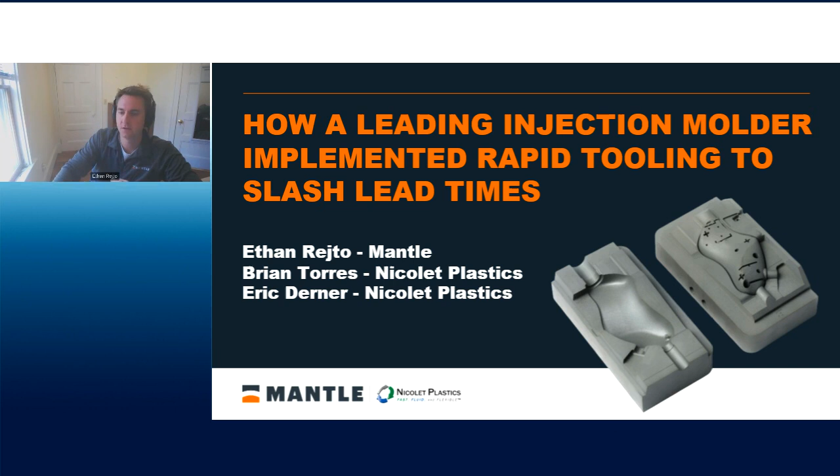A quick agenda for today, and feel free to ask any questions throughout, we'll be happy to take them. We're going to start with a quick introduction to Nicolet Plastics, who they are and what their business is. We'll talk about Nicolet Plastics and their journey with 3D printing in general, and about Nicolet Plastics and tooling. We'll do a quick introduction to Mantle's technology and how it works, specifically how it was designed to produce injection mold tooling. I have a couple inserts on my desk here today that we'll be talking about and looking at. Then we'll discuss how the impact is adding value at Nicolet, and look at some examples of how they've been using the technology, plus a few other examples as well.

So with that, I'll turn it over to Brian here to tell us a little bit more about Nicolet and their operations.

Good afternoon everyone, Brian Torres with Nicolet Plastics. I am the Chief Commercial Officer here. A little introduction about Nicolet Plastics: tooling is very much at the heart of who we are and who we continue to be. Our humble beginnings started in 1976 as a tool maker, and over the years we transitioned into an injection molder, continuing our tooling efforts in 1985, which is when Nicolet Plastics was founded.

Through the years and changed ownership, ultimately Nicolet Plastics was purchased in March of 2017 by a family-owned business that's very much a staple in the Wisconsin area. The family was looking to diversify their ownership and ultimately decided to start up a manufacturing arm of the family business, and that's really when True Venture Composites was established. Nicolet Plastics is the first manufacturer within that family ownership division.

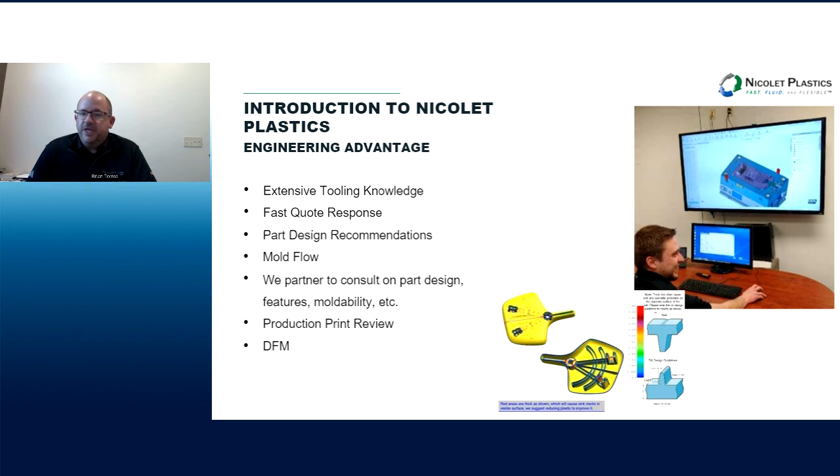Mentioned part design recommendations. We do have an entry-level mold flow analysis in-house. When we have projects that require more of that, we often partner with the Beaumont group to take us through more in-depth mold flow analysis. But we provide our customers with DFMs, production print reviews, and ultimately the earlier we partner with our customers, the more value we find in what we provide to them. And so, like I said, with material recommendations, design recommendations, the earlier we get involved in the project, the more value we can bring to the table.

We do have 3D printing capabilities with a carbon 3D printer that we brought online in 2019. We utilize this machine primarily for verification, prototype plastic parts for our customers. We actually also have some customers whose volumes are so low that they don't really warrant the investment into a tool. And so they will actually order plastic production parts off of our carbon 3D printer.

And the really nice thing that this allows us to do is really partner with our customers through the process. So not only can we produce prototype fit, form, function samples off the carbon printer, but now with the Mantle technology, it allows us to print rapid prototyping tooling, which we'll get into in a little bit. But with this technology, it allows us to provide our valued customers parts within hours, not weeks, in a traditional molding environment.

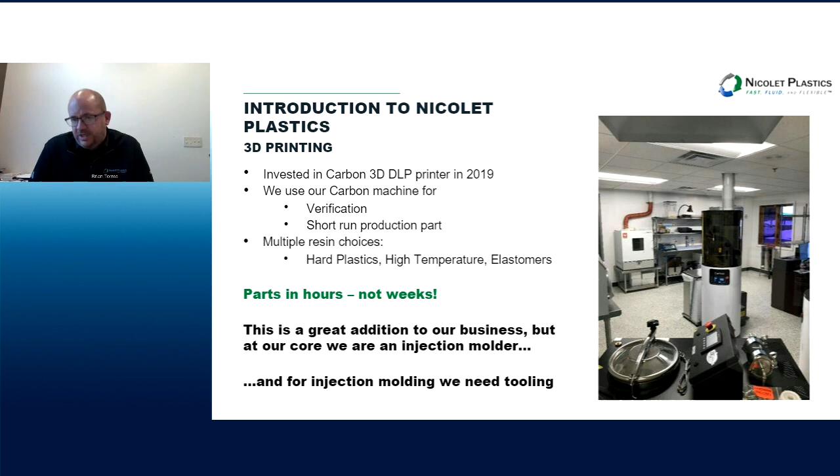Our tool room is in our Mountain, Wisconsin facility. That facility supports our tooling needs for all three, well, two of our current operating facilities, ultimately all three once we get up and running. We've got 6 full-time journeyman tool makers on staff, capable of managing rather large projects, up to and at times over 100 total tools. We do some of our own complete tooling builds from the ground up, continuing to do more of that with the Mantle technology. We also outsource some of our tooling both domestically and offshore. But by and large, we're doing almost all of our mold builds, engineering changes, maintenance, repairs, and modifications in our Mountain, Wisconsin tool room.

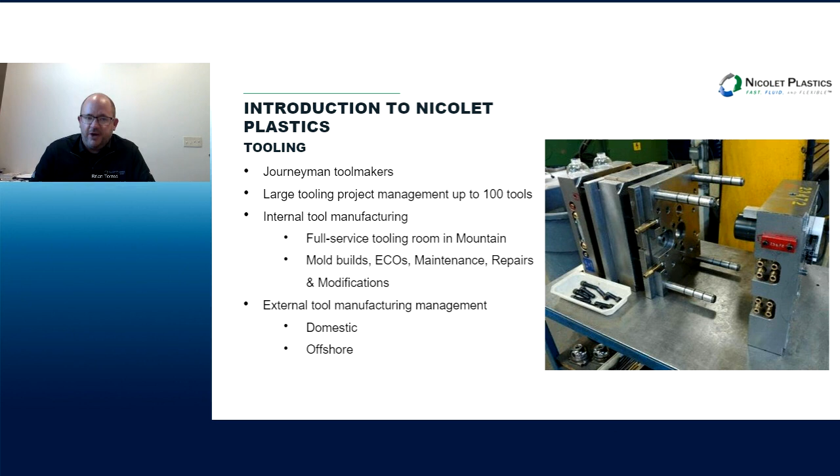Good afternoon, everybody. So some of the challenges that a lot of people run into with tooling out there in the real world is long lead times, and along with that comes the high costs. Prototype tooling is challenging - it's hard to do very cheaply and very quickly these days. It's also hard to find experienced tool makers. They're not around anymore, they're like gold. So if you have some good ones, please hang on to them.

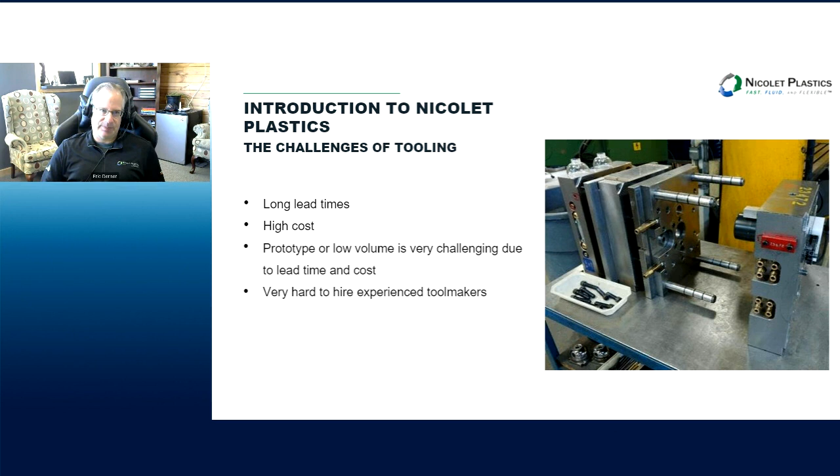So that kind of leads us into why did we choose Mantle. Mantle allows us to make production tooling in actual prototype time. Think about it - if you're thinking about making some plastic parts and you really need to test this in an injection mold tool, we can now make that tool within a week. And it's actually a good production grade tool. We're talking H13 pre-hardened steel here for tooling.

Most of the inserts that we print with, when they come out of the machine, they're anywhere between 75 and 95% complete. Obviously you still got to do some waterline tapping, clean up ejector pin holes, and do some final fitting on some of the shut-off surfaces. So again, it's dramatically reduced our lead time.

And with bringing the Mantle machine on, I kind of think of it as a three-quarter journeyman tool maker, right? They're doing all the magic behind the scenes. This thing is going by itself. It's been a great addition to Nicolet Plastics.

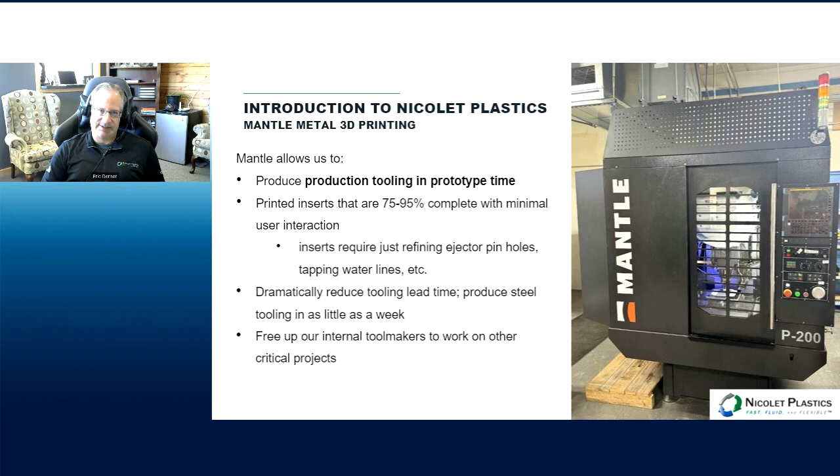So it is expanding our business. We're trying to get involved with our customers quicker because we're able to offer them some of the prototype solutions they're looking for. Some of the other things that are really good eye openers now with this process being a platform-up type manufacturing process is we can offer conformal cooling, where we couldn't do it before effectively and cost effectively. It just becomes part of the package now with building a tool from the platform up - you can just automatically add the conformal cooling.

Again, producing highly complex parts - that's kind of where the Mantle machine really shines. I would actually call it a core making machine, where you have a lot of ribs and stuff that you traditionally burn with an EDM, really complex geometry. That's where the magic of this machine really, really shines.

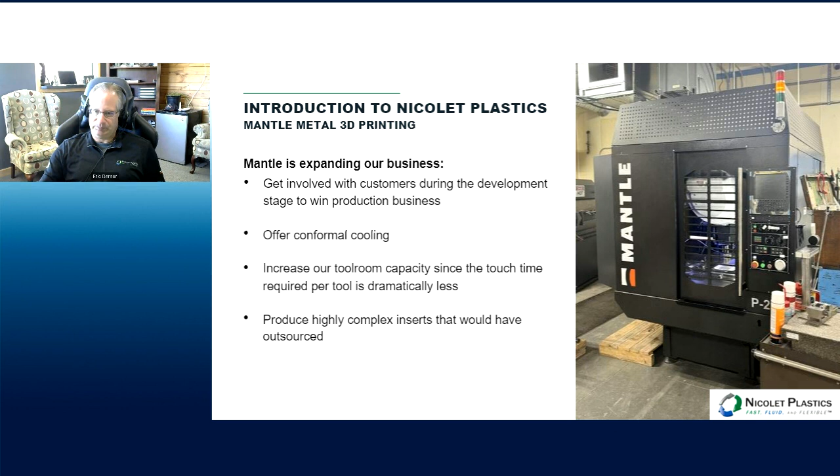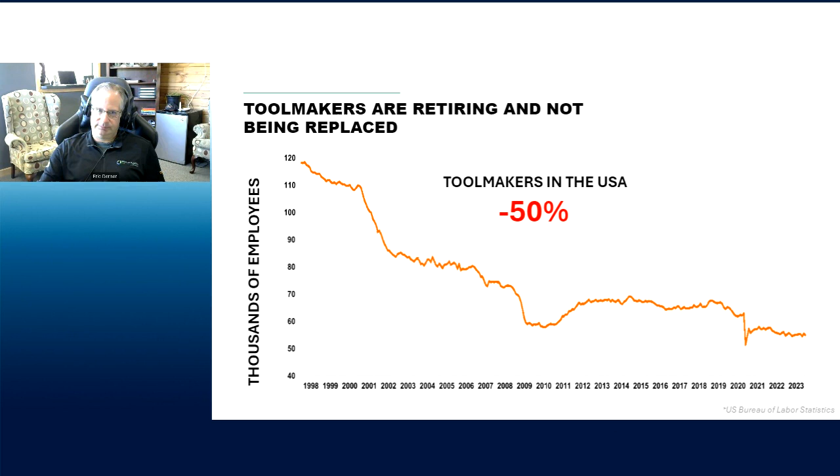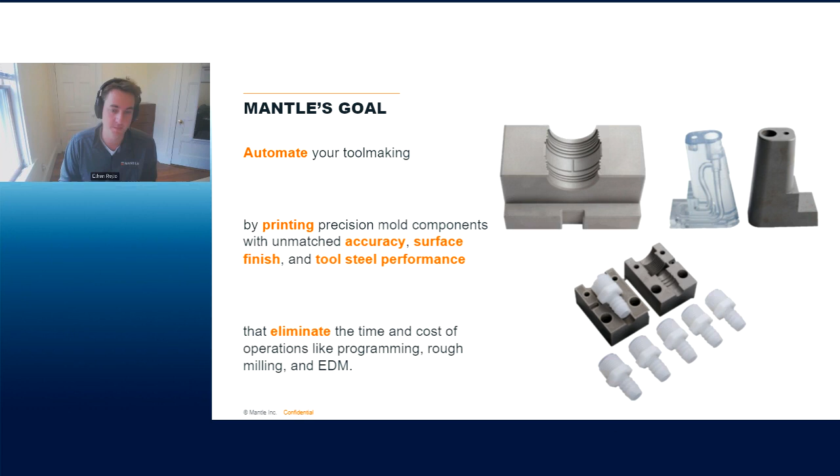Awesome, thanks Eric. I know we'll get back to you in a little while to talk through some of the use cases, but quickly I want to chime in here and share a little bit more about Mantle and how it works. Mantle at our core has a technology that was designed to automate your toolmaking processes. We do this by printing precision mold components with unmatched accuracy, surface finish, and tool steel performance, with the real value being that it eliminates much of the time and cost of a traditional toolmaking process - like Eric just mentioned, those EDM steps, the rough milling steps, the wire EDM, and the programming involved, all of that being eliminated and automated with the technology.

And one thing that's very unique to Mantle is that our technology was designed specifically for printing injection mold tools. It's the only application we target, it's the only application we do. All of our customers are using it for printing injection mold inserts.

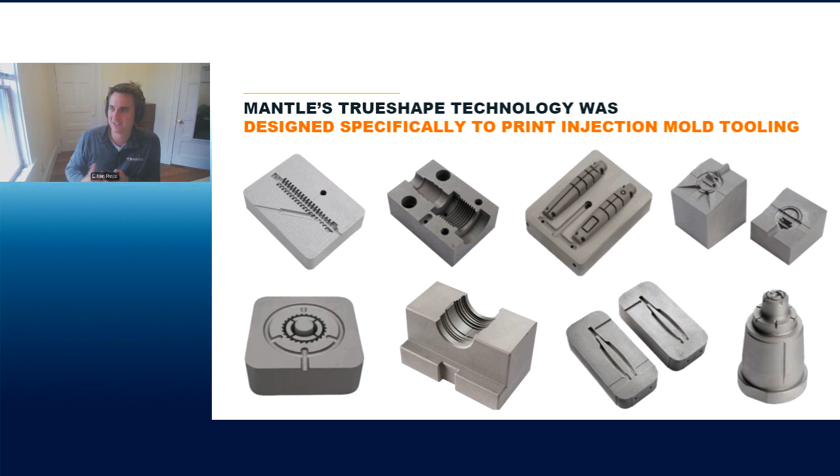We're not doing rocket parts or medical parts or anything like that other metal 3D printing companies are doing. The only thing we're printing today is injection mold inserts, and that's what our customers are using. We knew the requirements for injection mold tooling were quite stringent and difficult, and we really designed our technology to deliver on that.

In terms of surface finish, we see a 1 to 3 micron RA, on a Charmilles 26 or a D2. I don't know, Eric, what you think, but we often compare it to a fine sink EDM finish. Can you chime in on what the finish on a Mantle insert would be in comparison? Yeah, that's about really what it is. You can really get down to the final finish steel even with just rubbing a 400 grit stone on it. It polishes out really, really well.

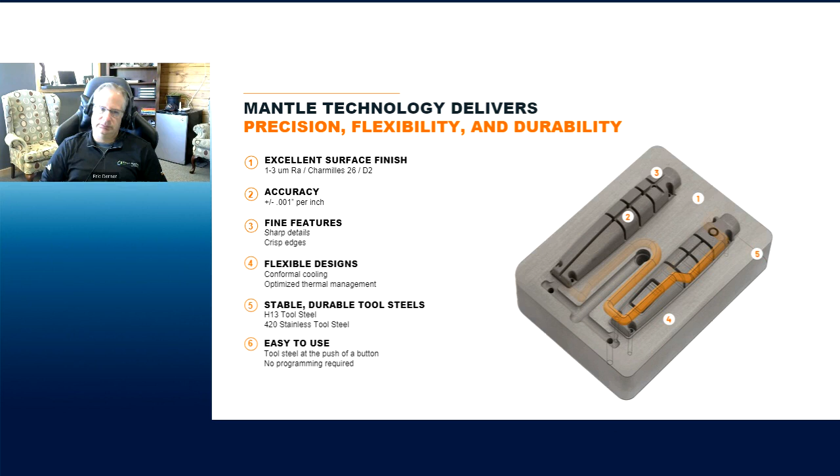That's a good thing to add, that of course it can be polished up to those mirror A2 finishes if you need to, but as printed, you're getting that matte surface finish, holding a thou per inch tolerance, really sharp, crisp details, EDM sharp features, which we'll talk about how we accomplish that, flexible designs to enable things like conformal cooling, like Eric mentioned.

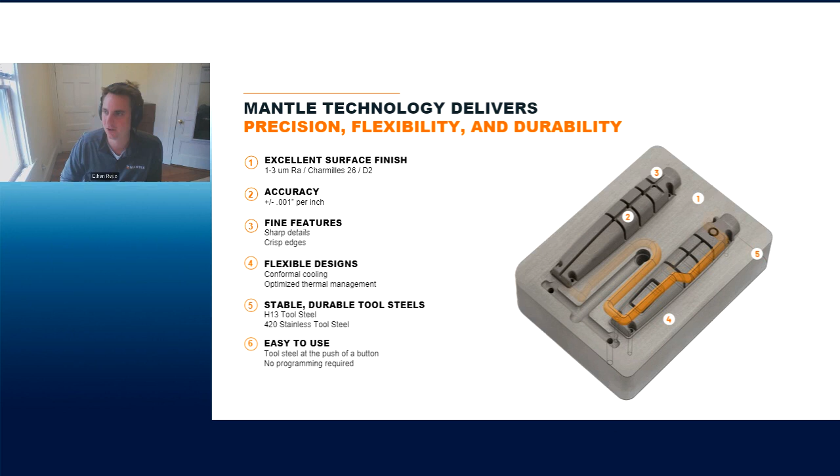Stable, durable, well-known tool steels - we're not printing some material you've never heard of. H13 tool steel is really our mainstay, as well as 420 stainless steel. And the technology is super easy to use. It's not some really complex system that takes a PhD to run. I'd like to say we could teach anyone on this call how to use it in a matter of an hour or so.

Another thing that's really important, and I'll ask Eric for his thoughts here, is how compatible it is with standard operating procedures, where we did mention that it gets you 75 to 85, 95% of the way there. Often there's a need for some grinding, some finishing of ejector pins, polishing, texturing. Eric, has your tool room found that these inserts are pretty easy to work with generally once they come out of that process?

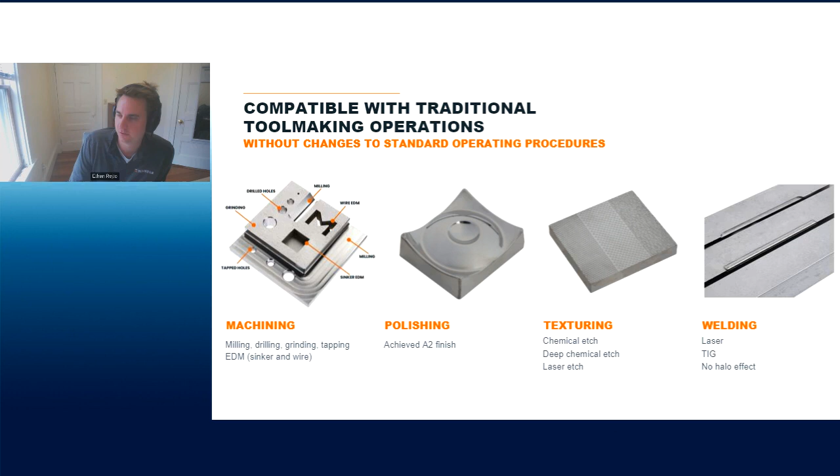Yeah, it's basically like taking a block of tool steel off the shelf. It's chemically identical right down to the molecule level. So there is no difference in your machining operations that you traditionally do.

One thing I would like to add is, with the Mantle technology, after it's printed and then goes into a sintering oven, you can now think of your mold block as being thermally stress relieved at 95% complete. So as tool makers know, every time you touch a tool to a tool block, you're adding stress to it. So you're actually getting a more thermally stable material block when you're done with the Mantle process.

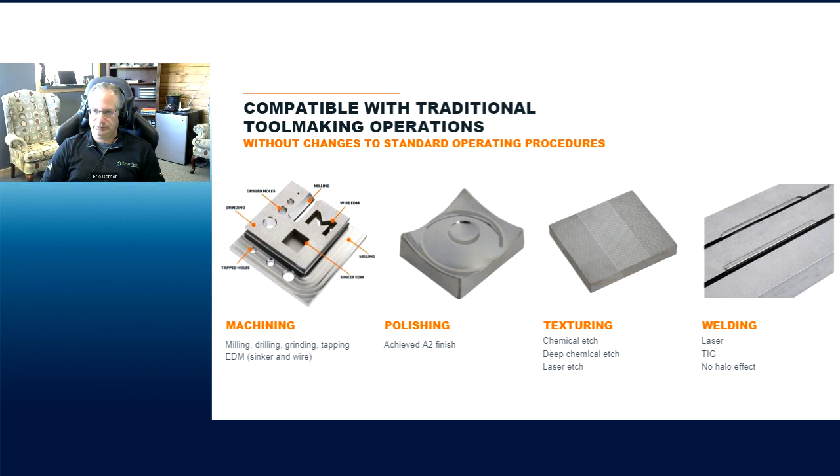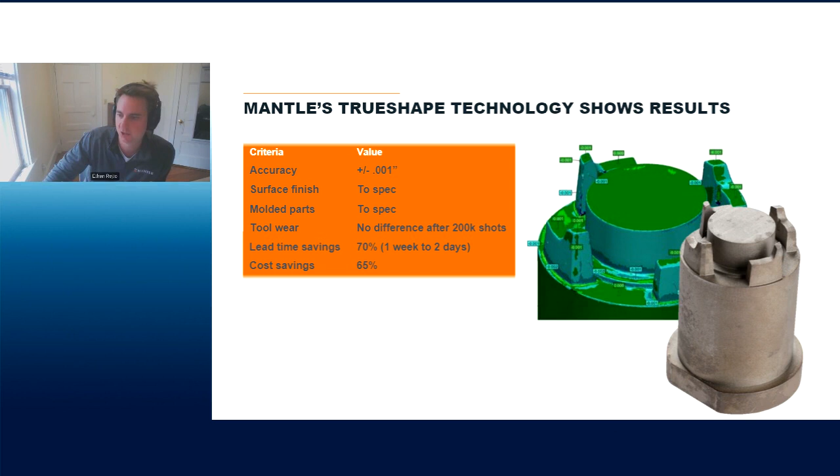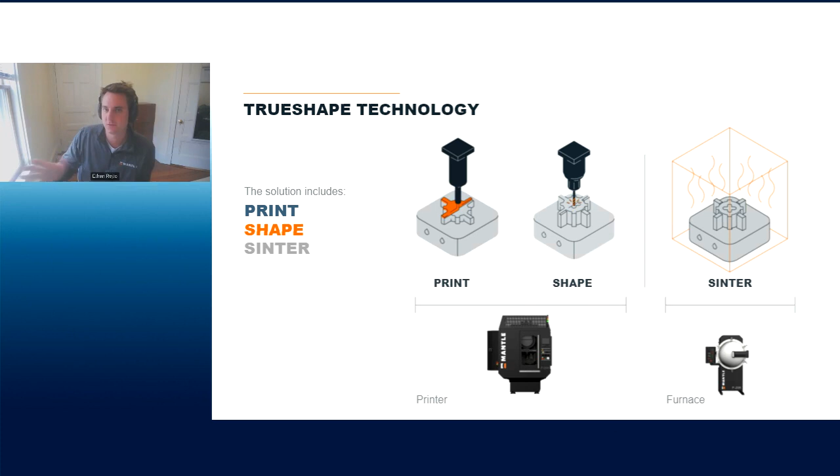All of this, of course, is controlled by the software. This is a question that we get quite a bit: how do I program this machine? What CAM software do I need to use, etc. Our software makes this super easy to do. You don't need to have any programming experience. You can really get up and running in just minutes, and it's going to generate all the tool paths for you. So both of these machines are run by the software, and this makes it super easy to use.

We won't talk too much about software today, but I just wanted to add that in because it's one of the most commonly asked questions we get.

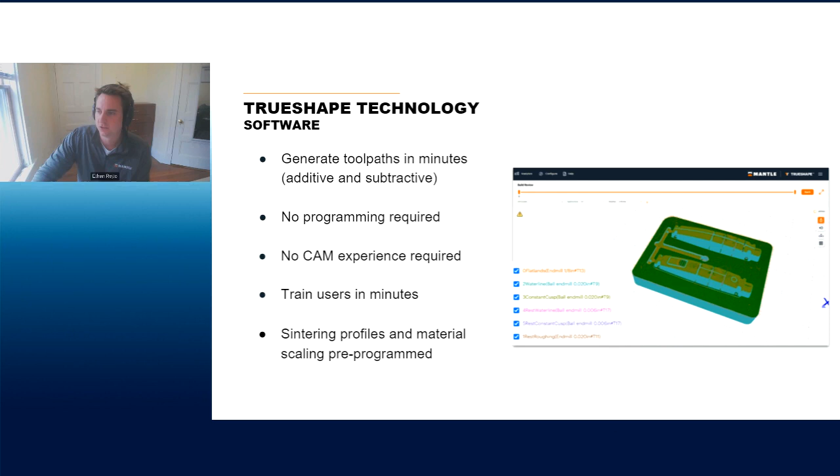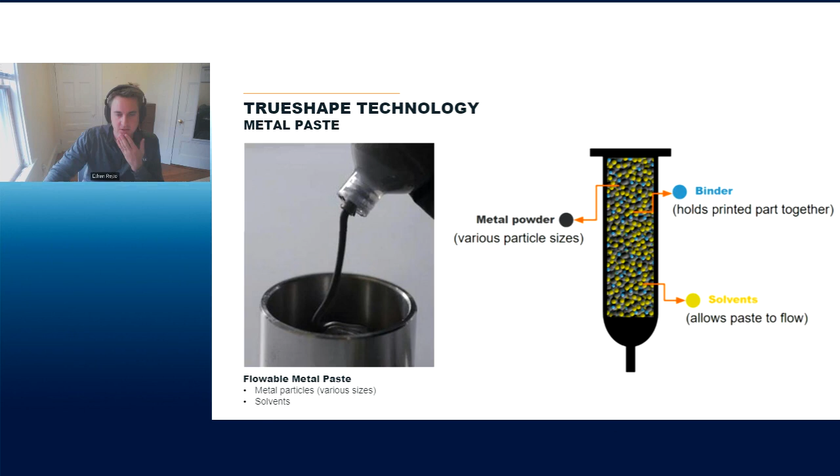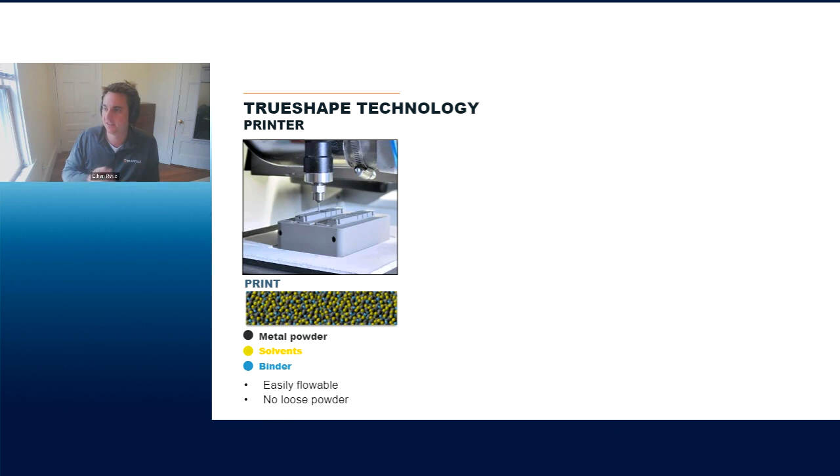So we start by simply printing a layer of this paste. We're just extruding it out of a needle like you're seeing here on the left. The solvent makes the material viscous enough that it can simply flow, and it can easily just be extruded out into the place that you want it.

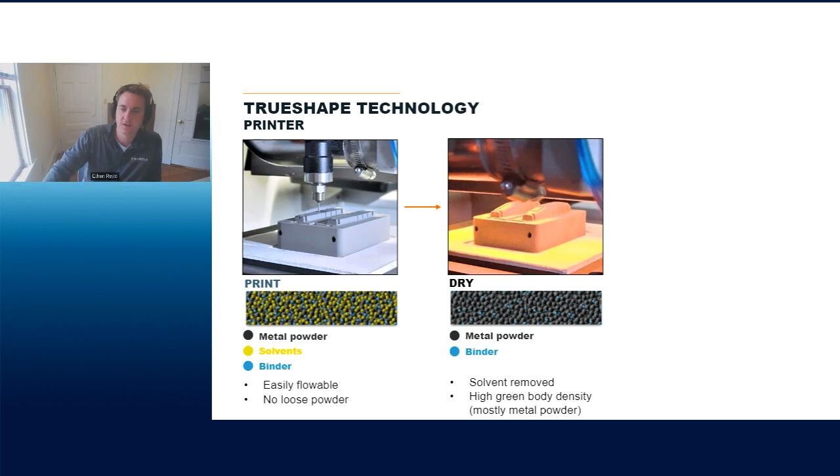After each layer is printed, we go through and dry that layer. What's happening here is that the solvent is actually being removed out of the layer, leaving behind just metal powder and binder. And lastly, one of the most important steps here is the actual machining step.

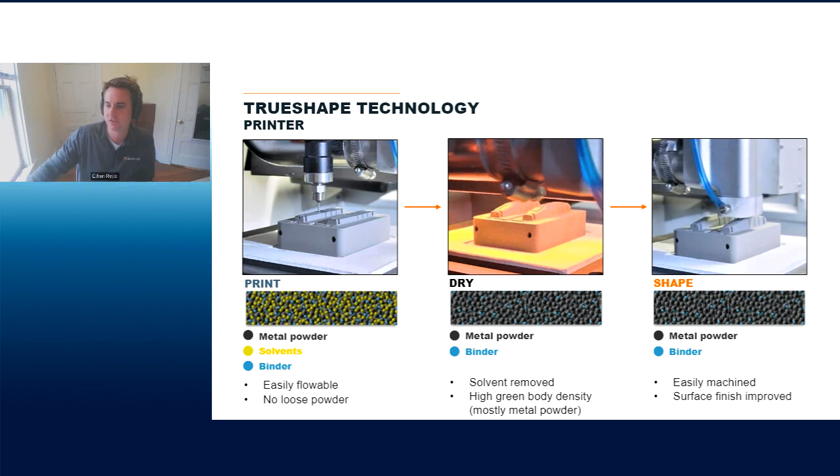Every single layer, we're printing a layer, drying a layer, and machining a layer, which is why if you look at our parts, which I wish everyone had one here in their hands, you can see the features are super, super crisp. You're getting those EDM sharp features. You don't see layer lines or anything like that. You're getting this excellent surface finish, and that's because every single layer is being printed, dried, and machined.

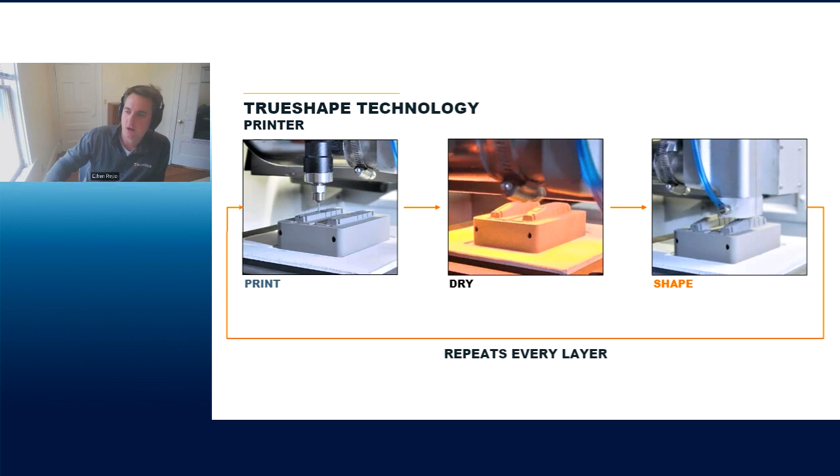This is happening over and over and over again, and it also enables us to do these really deep ribs and deep features that traditionally you'd have to do sinker EDM for, because it's print, dry, machine, repeated over and over again to build up a part, allowing us to do these really high aspect ratios, really small parts. I'll show a video here in a second because it's a little hard to comprehend sometimes, but all three of these steps are happening inside of this one machine, all happening inside of the printer.

I'll show a quick video here walking through the different steps. You'll see it starting by simply extruding that paste material. It's not even being heated, it's viscous enough to just extrude it out, print a layer, go through and dry that layer, which removes that solvent out. It's firming it up so it's firm enough to be machined, and then it goes ahead and is machined.

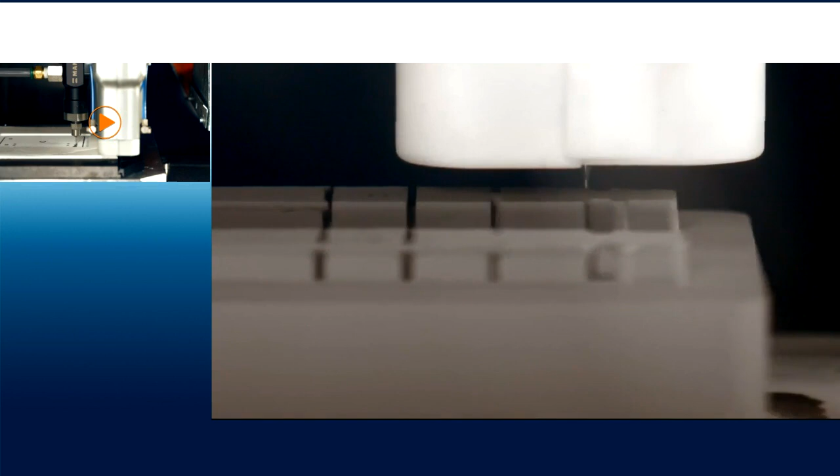We're using standard cutting tools here. Our smallest tool is actually a 6 thou ball end mill, so some really, really small cutting tools. You can see the shapes are refined, improving the surface finish, adding features that couldn't have been printed. This is going to repeat over and over again to build up the part.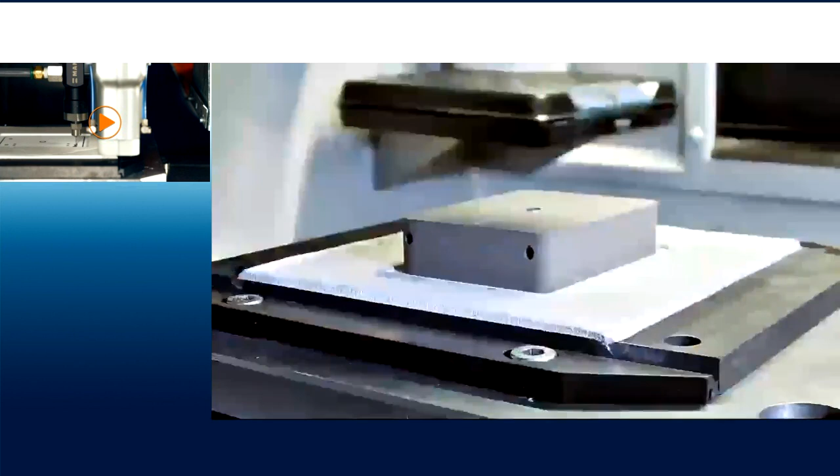Let's finish here. So once printing is complete, then we go into a furnace. What's happening in the furnace is a sintering process, very similar to what happens in a metal injection molding process or binder jetting process, where the part actually shrinks inside of this furnace. The metal powder fuses together, the part densifies, and comes out as a dense, strong metal part. So the part does shrink about 9% in this process in the furnace.

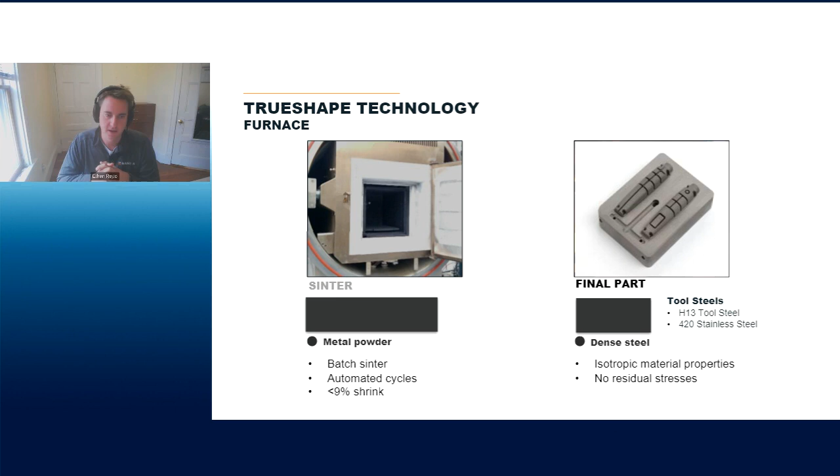Our software, of course, accounts for that, and even with that 9% shrinkage, we're still able to hold plus or minus 1 thou per inch, which is really challenging generally in other sinter-based processes where they're shrinking more like 18, 19, 20%. So after printing is complete, you put the part into this furnace, it runs, and what comes out is your dense, strong tool steel components like I'm holding here.

So all in all, you can see there are these 4 major steps to this process. And what's really important to know is that this technology was designed specifically for this toolmaking process. It's designed to deliver the features that are involved.

One thing that's pretty cool is that our smallest tool actually used to be a 20 thou ball end mill. We got feedback from people like Nicolet and other customers saying, 'I wish we had smaller, get closer to an EDM sharp.' Now the smallest tool is a 6 thou ball end mill. So a lot of advancements have happened to really make sure this technology is what our customers need for the tool making process.

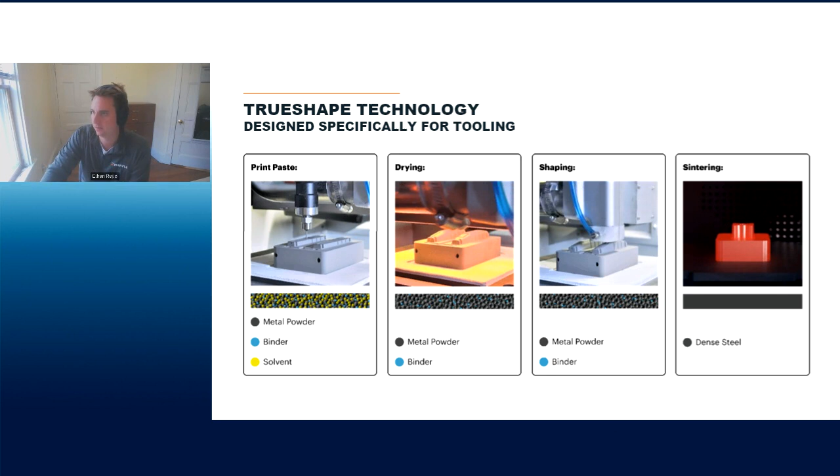Now we'll go into talking about a couple of examples here. I know Eric has a couple of examples he wants to share from Nicolet, and I have a couple more to include from some of our other customers as well.

So what we wanted to do with Mantle, or what Nicolet wanted to do, is take a part that had some challenging geometry—something that's not just an open and shut parting line, something with steep angles, something that would have required some EDM time, and pretty much an open cavity, to the point where we needed an insert for venting purposes. As you can see here, here's a couple of cavity blocks.

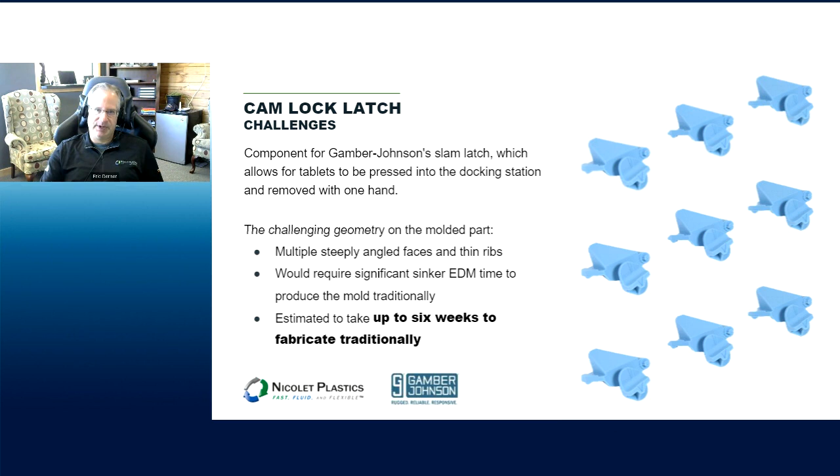You can see the multiple stepped parting lines, and the insert pocket that was actually machined in with the Mantle process. Along with the core and cavity blocks you see here, we also did print that insert block that fit into that pocket.

We had about 10 hours of final finishing time to make these blocks moldable. The insert pocket itself was in very good condition—we just needed to do some honing on the insert to fit in there. Traditionally you'd have to wire that with EDM, doing multiple skim passes to get an insert to fit, but it was relatively easy with the Mantle process.

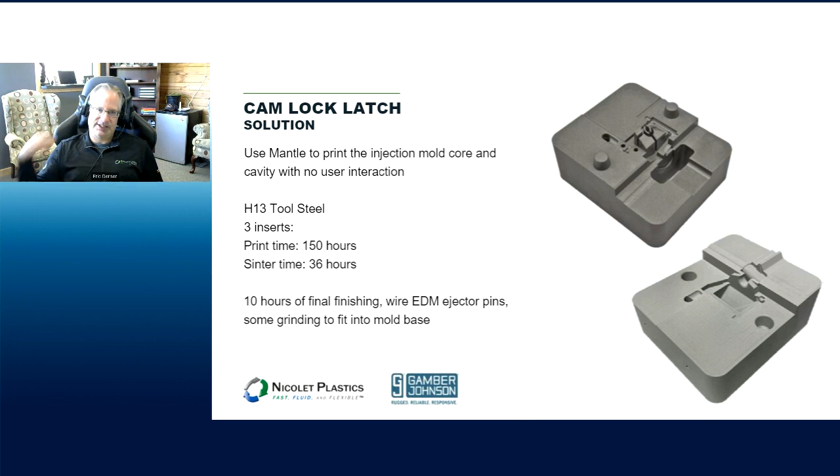All in all, this saved us hours—it took 4 weeks off our lead time, taking it from 180 hours of machining down to about 12 hours of actual machine time for the tool maker from a tooling touch point.

The end product was a nylon 6/6, 35% glass filled, as you can see there. We did have to do a little touch-up work on the parting lines—again, that's part of that 75 to 95% complete block.

All in all, this process went really well. I did challenge the tool room to change their thinking a little bit and do the least amount of work on the core and cavity blocks as we can. I wanted to get this into the machine and, from the first shots, know what this process does.

They went down that road, a little reluctant, as tool makers are. We went out there and shot some of the first parts, and within about half an hour we had parts falling into the box. A couple little areas had a bit of flash we had to touch up, but all in all, to get this part from concept to completion in basically 2 weeks is pretty amazing.

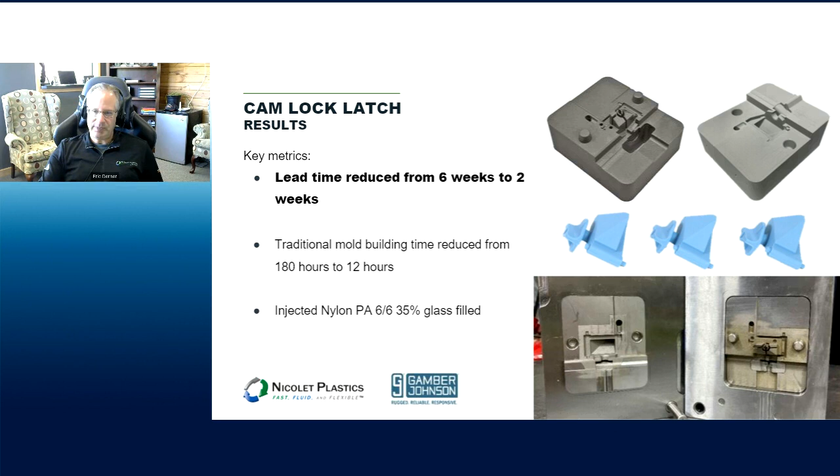The second project we worked on was similar to the first—multiple stepped parting lines, a big wide open cavity, and lots of detail on the core side of the tool. Another good fit for the Mantle process. A lot of EDM work you'd normally see in small rib pockets and things like that were completely eliminated with the Mantle software and process.

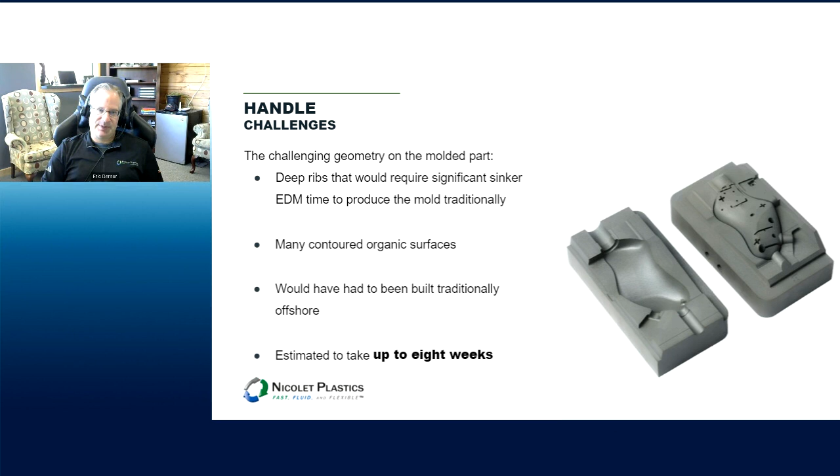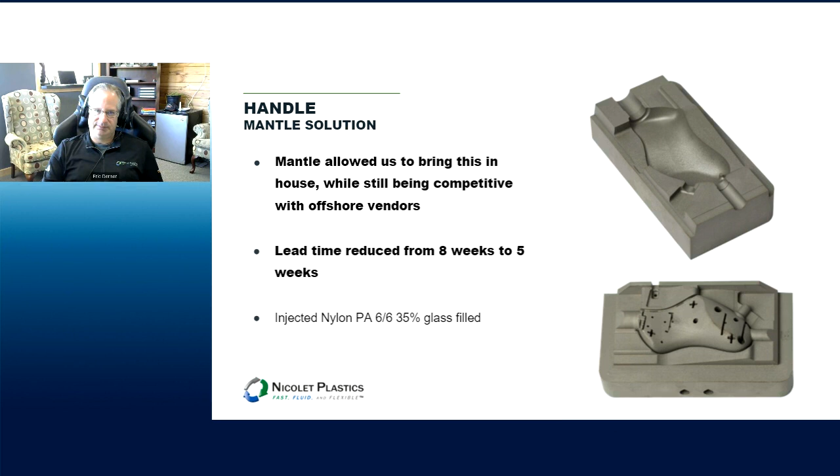Again, same thing as the previous one—looking at the chart at the top showing all the different steps it takes to make a tool, using Mantle technology we pretty much eliminated all of them except for the final finishing process.

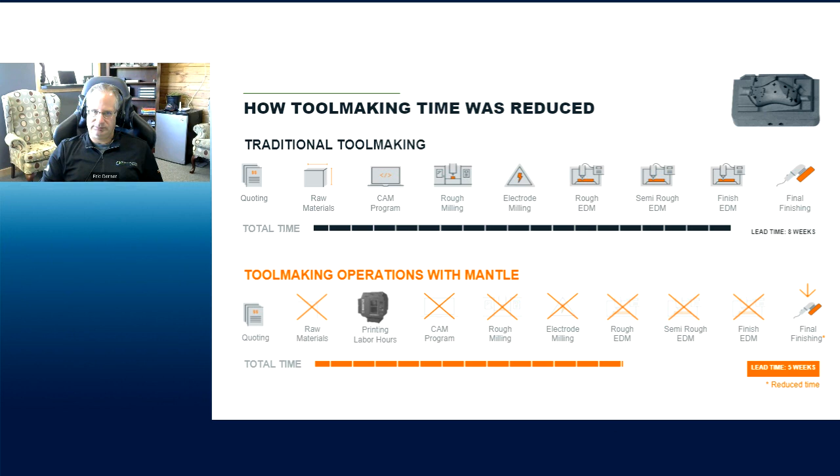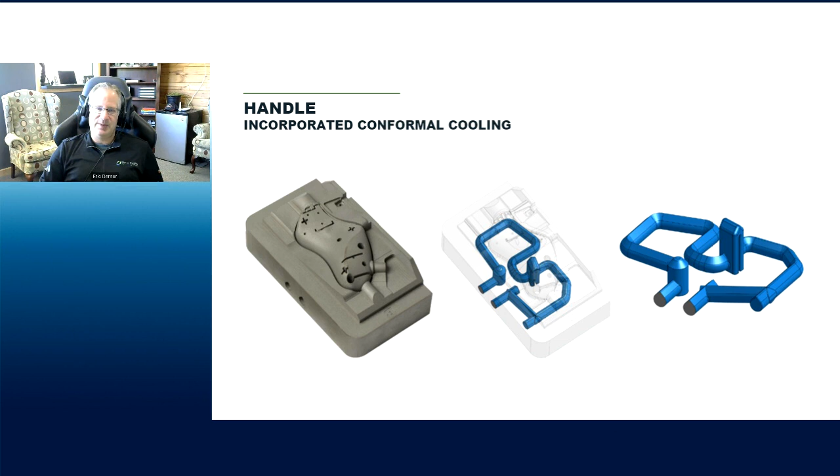Again, looking at what did we need to do with this tool. This one here, we actually incorporated conformal cooling, trying to get that cycle time quicker and quicker on the tool. And the option was there. Why not use that? Why not use the conformal cooling technology that's out there? It doesn't cost you anything anymore. So another great feature with the Mantle technology.

Awesome, thanks Eric. You bet. I'm going to quickly share a couple more examples from some other customers, and then of course we can take some questions and go back and look at other things.

More on the OEM side from our customer Heyco, who makes these wire management components. Another really good example, similar to the last parts, in that really small ribs, parts that would require a lot of sinker EDM time. Conventionally, they were saying this would have had to have rough milling, a ton of electrodes made, squaring of the block, drilling and tapping of holes, a lot of sinker EDM time, wiring of ejector pins and burning of gates.

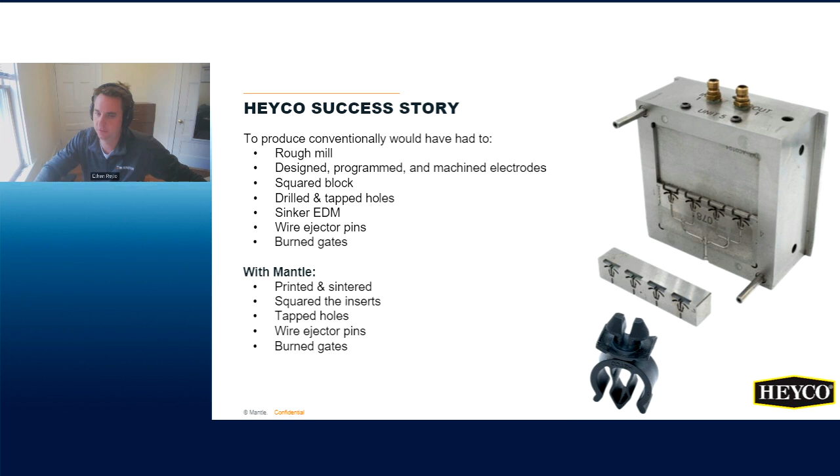With the Mantle process, they printed and sintered this with little to no time from their tool makers. They squared the inserts, tapped the mounting holes, wired the ejector pins, and burned the gates. The really important thing here, and it's a pretty common theme similar to the parts Eric was just showing, is that the cavity detail, the EDM kind of features that would have required EDM, were left as printed. They didn't have to be touched, which we generally find are the most time-consuming and expensive parts of a tool build. So leaving those parts and features as printed saved a ton of time on this insert and a lot of the different inserts we're looking at.

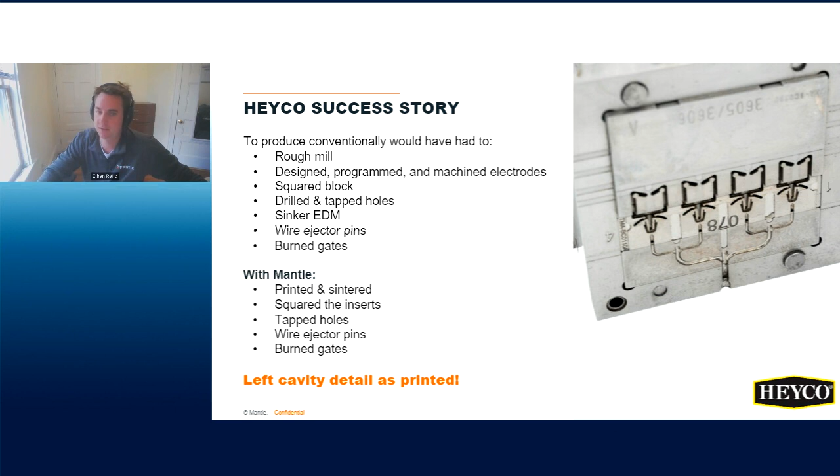Another good example here, just a little bit of some of the results of this part. All of the molded parts functioned as expected - fit, form, and function were equivalent. They've shot over 1.5 million shots on this tool. They saved over 2 weeks, and they saved 60% of the cost compared to producing this tool traditionally. So just another great example of a really good fit for the Mantle process.

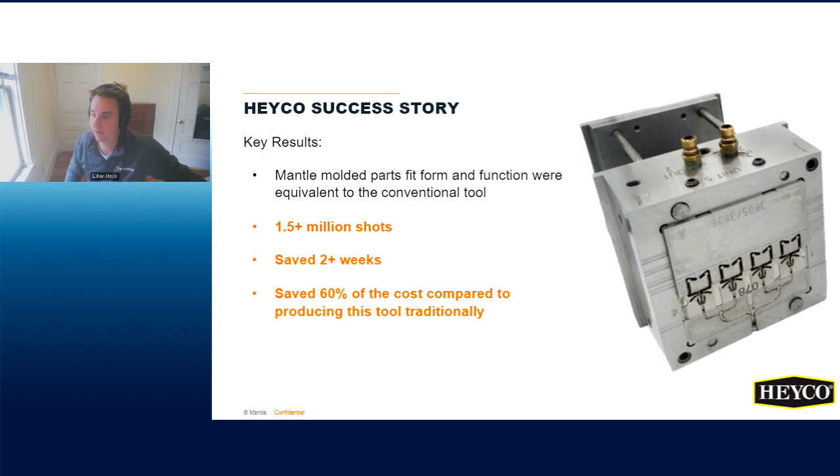Another cool component here, this is actually a threaded component. They needed to test a new thread design, and this is just some of the thinking that happens once you have a Mantle machine in-house. They took an insert and cut a pocket in it, which is what you're seeing here, and printed a few different inserts and placed them inside of those pockets to really take advantage of the Mantle process to reduce the size as much as possible so it would print as quickly as possible. This printed in just 2 days.

They left all of those sharp threads as printed and only required 3 to 4 hours, they estimated, of toolmaker time, which was squaring of the blocks and tapping of those mounting holes to mount that insert inside of the insert. The result was they were fully functional NPT threads - they gauged and sealed properly. They saved over 2 weeks. This was for a new product development process, so they were able to really test these new threads, test this new design to understand, is this what we want to go to market with, or do we still need to do some product development and evaluation?

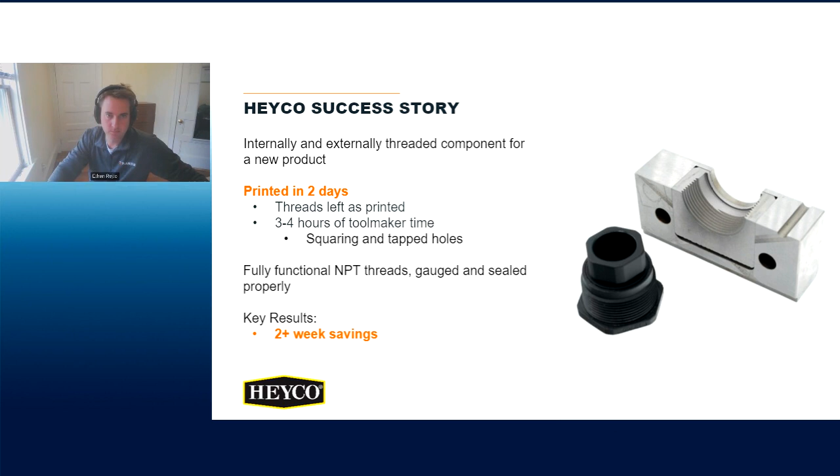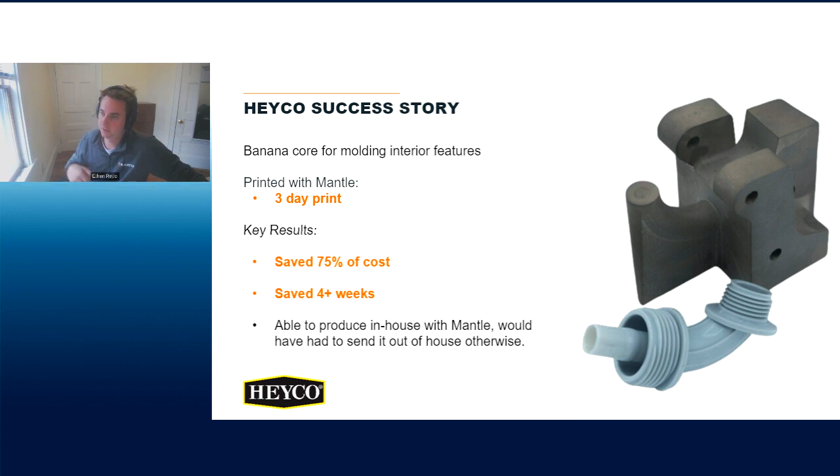And one last one here is just another really good example of all the EDM sinker time that can be saved. This had a 15-degree parting line, which made it quite challenging, as well as all these small, deep ribs.

After printing was complete, they just did a little bit of finishing, which was squaring of the inserts and tapping the through holes. This saved over 40 to 60 hours of sinker EDM time, which was reduced.

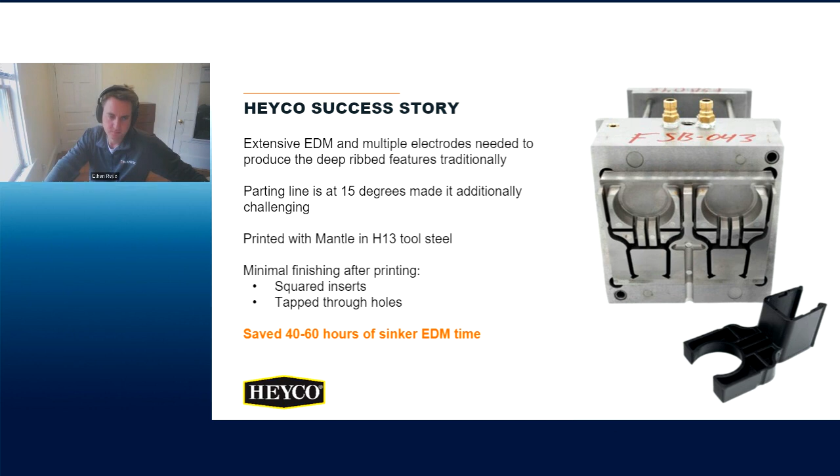Switching over to talking a little bit more on the mold making side and the product development side, this is a part from Westminster Tool, a toolmaker located in Connecticut. They were approached by a leading medical device OEM to help them understand the prototyping process and the material compatibility process of bringing a new medical device to market.

They were looking to get these production representative parts, meaning they needed these parts molded out of a steel tool. They didn't want to use aluminum, and they didn't want to use plastic 3D printing. They wanted to know how these parts were going to mold in a production tool to validate part function, understand the molding process parameters and cycles, and help with different material selections through biocompatibility testing.

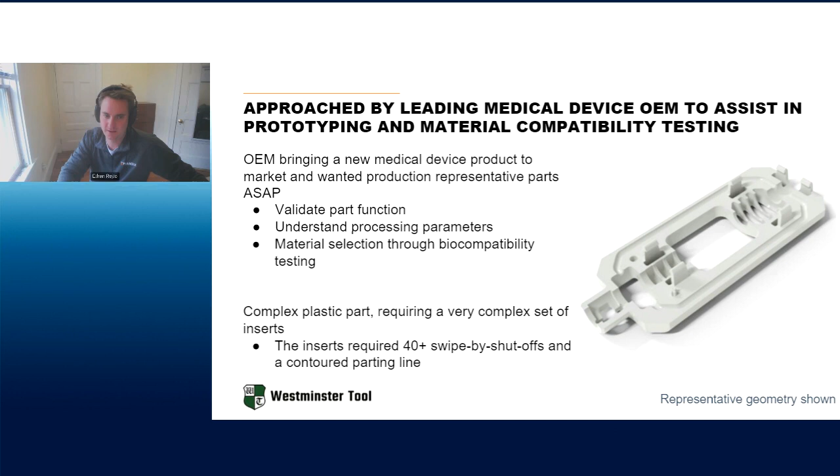The part was very complex, requiring over 40 swipe by shutoffs, as well as a contoured parting line. Unfortunately we can't show the actual part because it's still confidential, but this is just a representation similar to what the part looked like.

The process for Westminster Tool was to print these prototype tools in about 6 days. They said this was fully unattended, less than 2 hours of active time from their team, because it's that simple to set up and get this thing running.

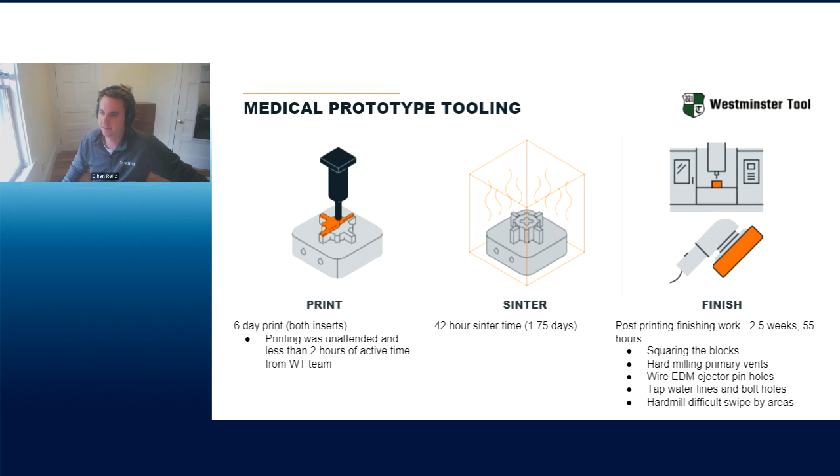Sintering was about a 42-hour sintered process, so about a day and a half. Then the final finishing work was 2.5 weeks, about 55 active hours, which was squaring the blocks, hard milling some of the primary vents, wire EDM of the ejector holes, tapping water lines, and hard milling a couple of the difficult swipe by shutoff areas.

But ultimately, the result was they were able to deliver production representative molded plastic parts to their medical OEM customer in just 4 weeks. This was a 50% lead time reduction, down from 8 weeks to 4 weeks. They saved 110 hours of active manufacturing time compared to traditional manufacturing, and delivered over 7,000 pieces of ABS and a PC-ABS blend for that medical customer to do their biocompatibility testing.

One thing not on this slide that's also really important is that because they did this prototyping and evaluation work for this customer, they were ultimately able to win the production order as well, for a much bigger, much more expensive tool. If they hadn't been able to do this early development work, they wouldn't have gotten that same exposure, which ultimately allowed them to win that production order. This is something we see on the molder side too, being able to get involved early in the development process, in the prototyping stages, thanks to Mantle's rapid tooling process, to ultimately allow you to win some production business.

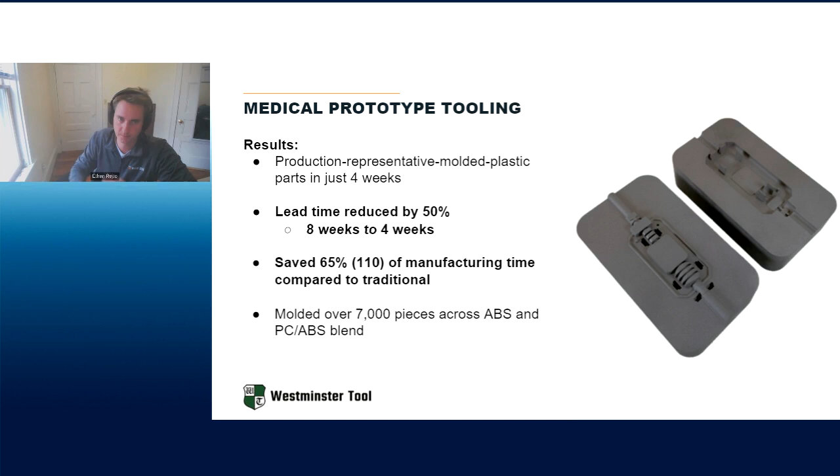One last example here, and one question we get all the time is about durability of our material. People often think about 3D printing as just prototyping, quick turns, low volume stuff. This is just one of our best durability examples.

Even with printing, they were able to produce these weeks faster than conventional machining. So over 1.65 million cycles, and that number's going up every day, those inserts are still running in a production environment in a big 32 cavity tool. So just one quick example of some of the durability that's possible.

And with that, we'll go ahead and switch over to some questions.

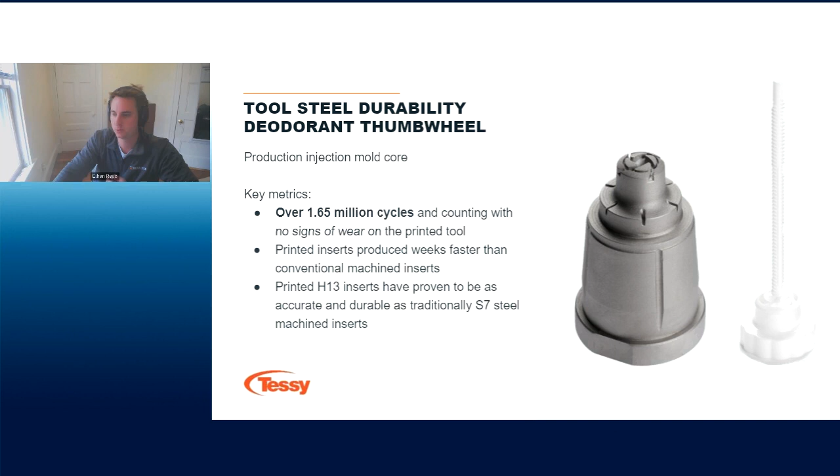You can feel free to shoot me an email. I think you'll have our information anyways, or click that link there. Would love to talk about your application and how Mantle can potentially help.

At this point, I see there's already some questions coming in, and we'll go ahead and take some questions.